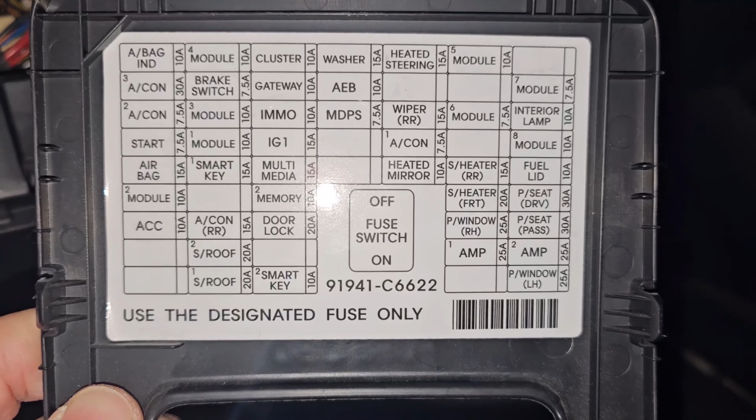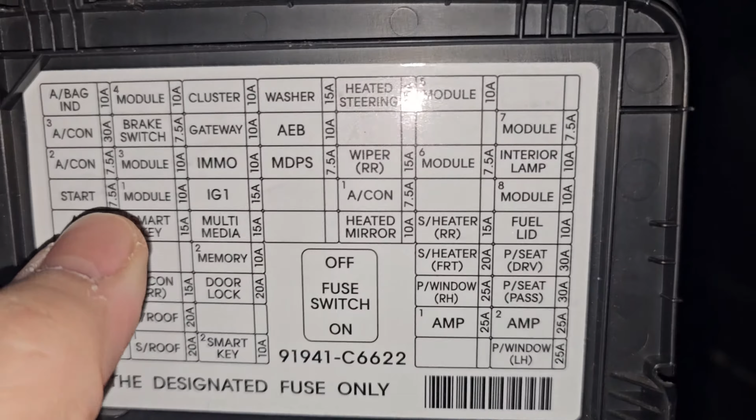As you can see, you can see all the names in here. Usually right now we cannot see the word turn signal or any brake lights in here, but we can see the modules. They have different module numbers: module 1, module 3, module 4, module 6, module 5. Usually it will be located in that area for the fuse.

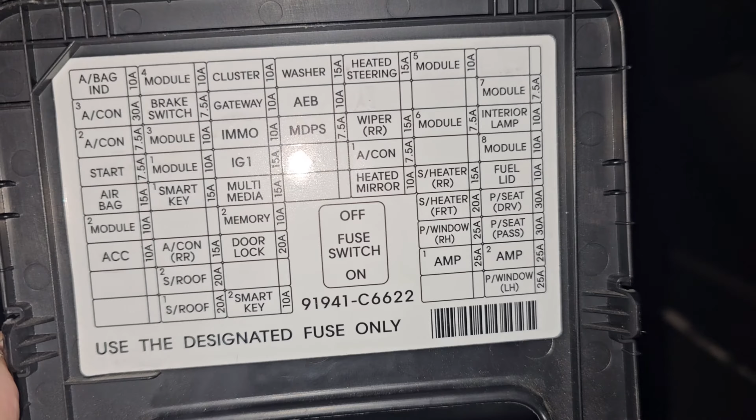Let's see, I'm gonna try taking out one by one to find which is which, but you have to use a long nose, this one, okay? And of course we have to turn off the engine. So I'll get back to you.

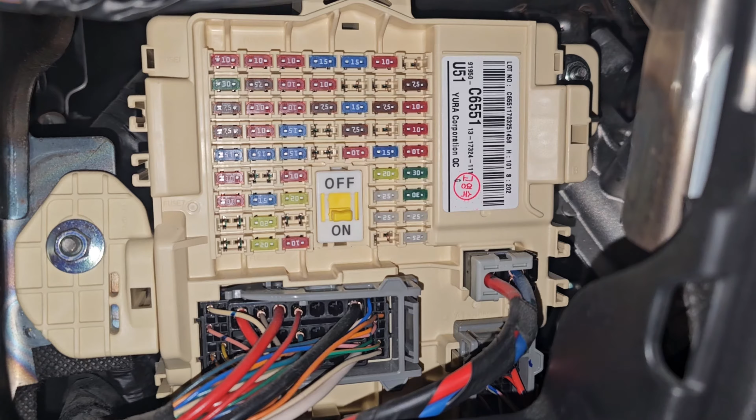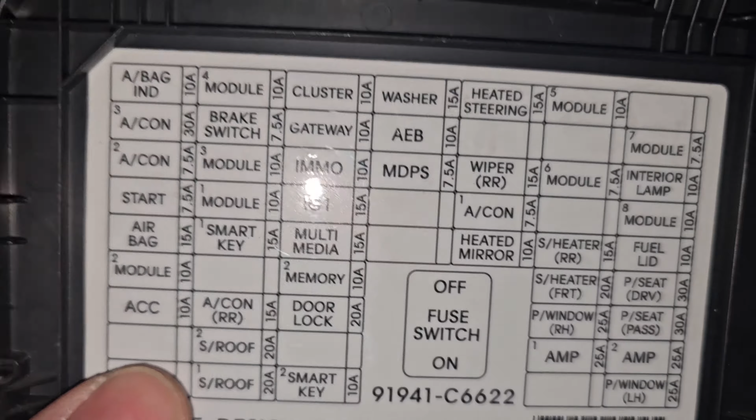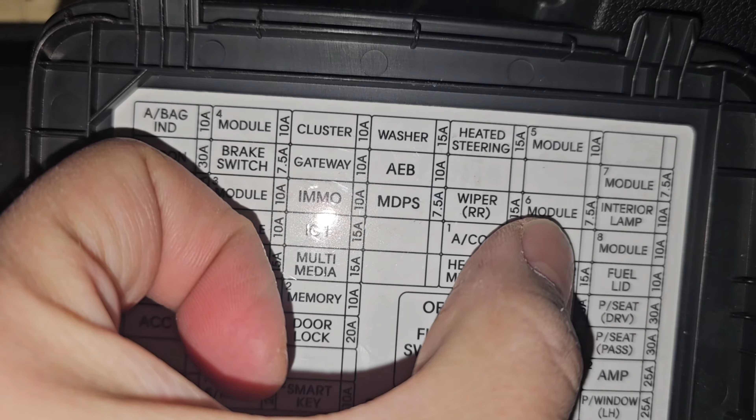Okay, so after a few minutes of finding all the viewer's requests, you can see in here. Now for the turn signal, it's located on module 6. So module 6 is located here, this one.

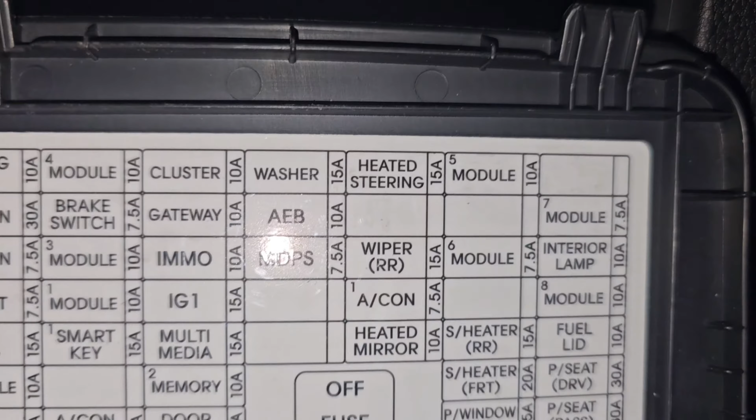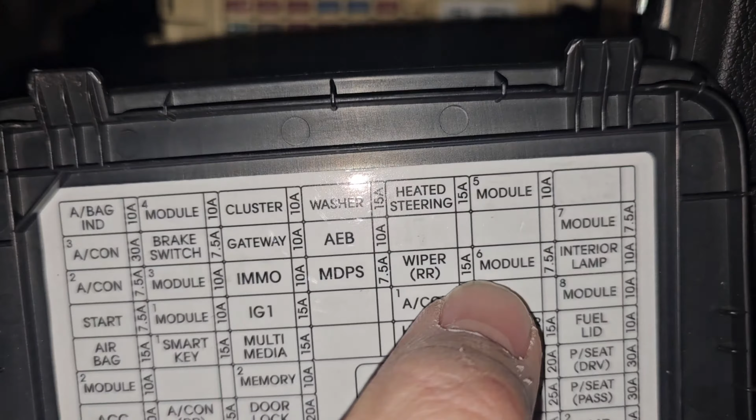This 7.5 amp fuse - so if you're having a problem with the turn signal, when you replace the bulb, everything is new, and it's still not lighting up, or there's no turn signal lights, it must be the module 6 problem or the fuse problem. That's the module 6, that's for the turn signal.

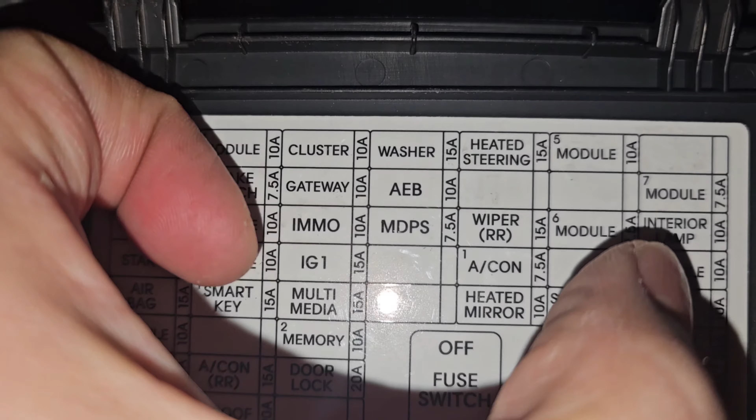Now if your tail light - it's different from tail light and brake light, okay. The tail light, this is what you use at night, the dim light. It's located on module number 8, this one. So this is where it's located, this one. It's a 10 amp fuse.

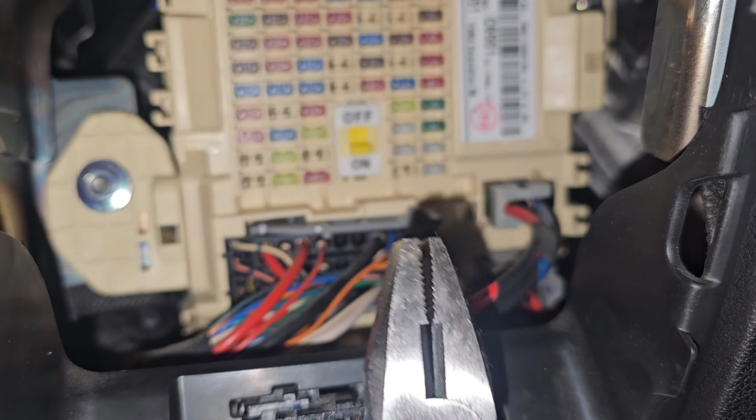You cannot take it out by hand, but just in case you don't have the long nose with you, because some people don't bring tools in their car, right? So just in case you're missing it - oh, this is the pliers, sorry - just in case you need to replace the fuse, so this is the long nose.

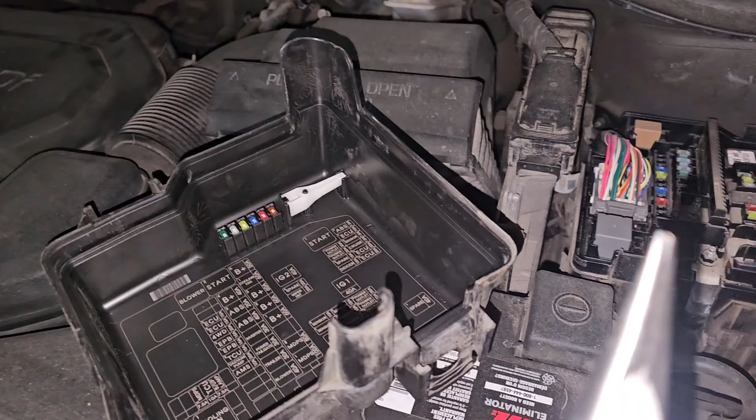There's another set of fuse box inside your engine. So how to take out this one - I'm just letting you know how to take it off. Okay, so how to take this off.

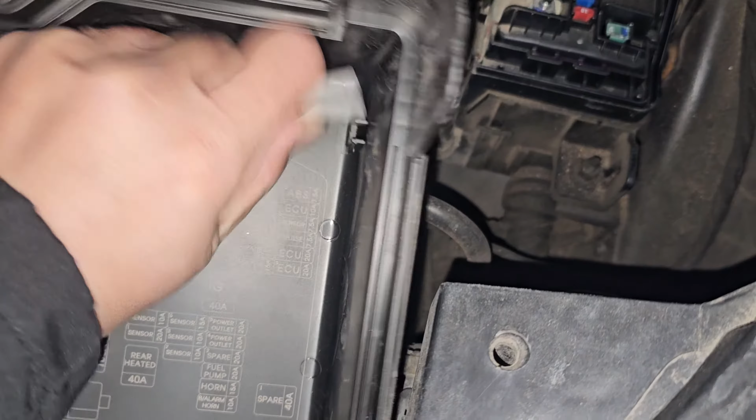This one, there's a lever, and this one, a lever. Inside of this fuse box you can find this small long nose to help you take out the fuse, just in case you don't have the pliers or long nose with you.

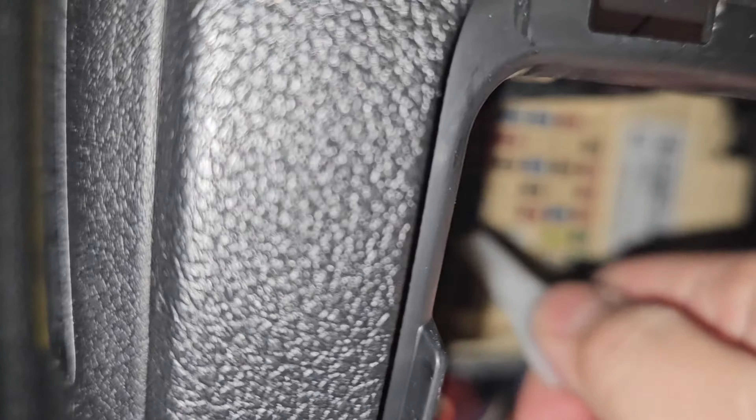So I'll show it to you how to use this thing. Just put the nose in front of the fuse like this. You see there's a teeth - you can see there's a teeth - so you can just put that teeth in between, in the front of the fuse, and just pull it out. See, it's easy. Then just pull it back, open it, and push it all the way in.

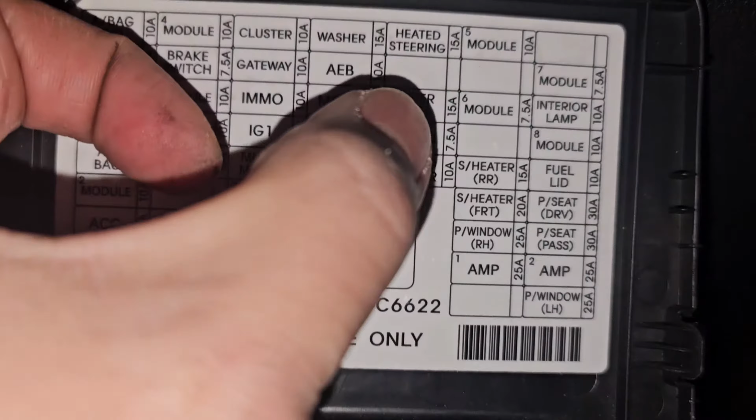Aside from module 6 and number 8, just in case you have a busted headlight, for example, and you change everything and there's still no light, it's located on module number 5. So it's located over here.

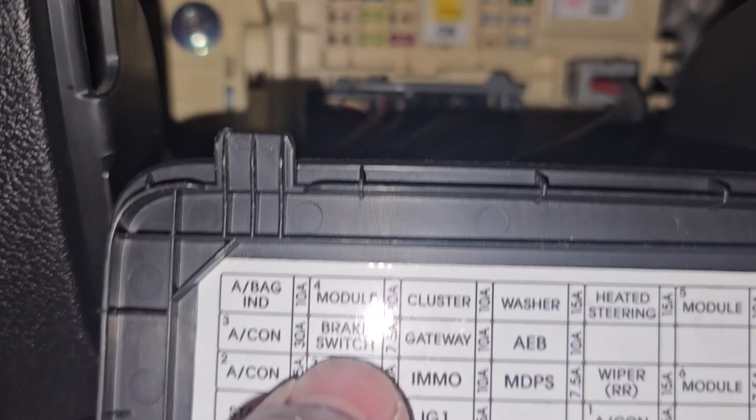And just in case your brake light is not working, and you change everything including the bulb, you can easily see it here, the brake switch. It's located this one, 7.5 amp.

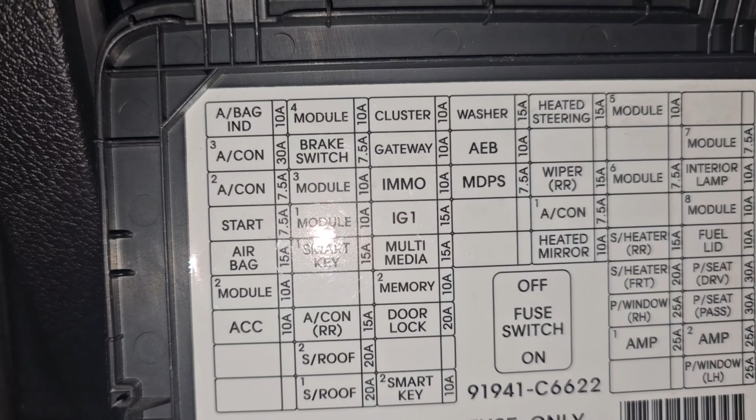Lastly, just in case your turn signal has no sound - usually we do have a sound for the signal light - and you don't have the dashboard light, meaning there's no light, no electrical digital on your dashboard, something like this, you see, it's self-checking everything.

So to find that fuse, it's located on the memory, this one, memory fuse. It's located this one. It's a 10 amp fuse.